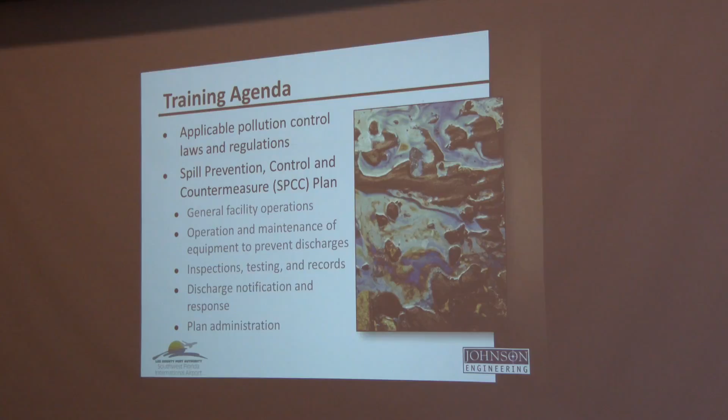The SPCC regulations have a similar origin to the SWPPP regulations. Both were born from the Clean Water Act enacted in 1972. However, the SPCC regulations are specifically geared toward oil. In 1973, the Oil Pollution Prevention Act was issued under Section 311J and Section 501 of the Clean Water Act. And the actual federal regulations now reside in 40 CFR 112. Another difference between the SWPPP and the SPCC regulations is that the EPA retains enforcement responsibilities of the SPCC regulations.

The Oil Pollution Prevention Act establishes the requirements for the prevention of, the preparedness for, and the response to oil discharges. It requires the development and implementation of an SPCC plan, and it details the procedures, methods, and equipment requirements necessary to move that plan forward.

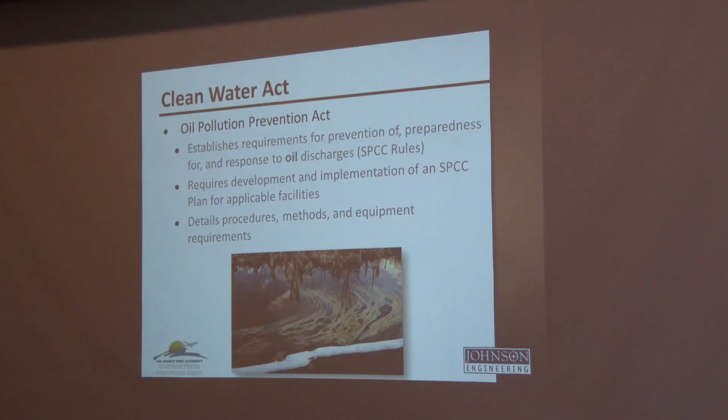So how does the SPCC rule apply? There are two requirements that must be met for the SPCC rules to become applicable. One is that the owner or operator of a facility has to be engaged in storing, transferring, distributing, using, or consuming oil. The second is that the facility could reasonably be expected to discharge oil in quantities that may be harmful into navigable waters of the United States.

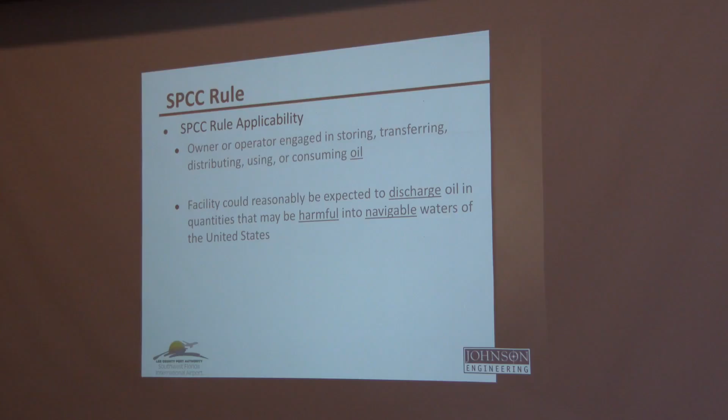So as with many laws, the true meaning lies in the definition of the terms used. And right here you can see I've emphasized oil, discharge, harmful, and navigable waters. And I'd like to jump into those terms in a little bit more detail before we move on.

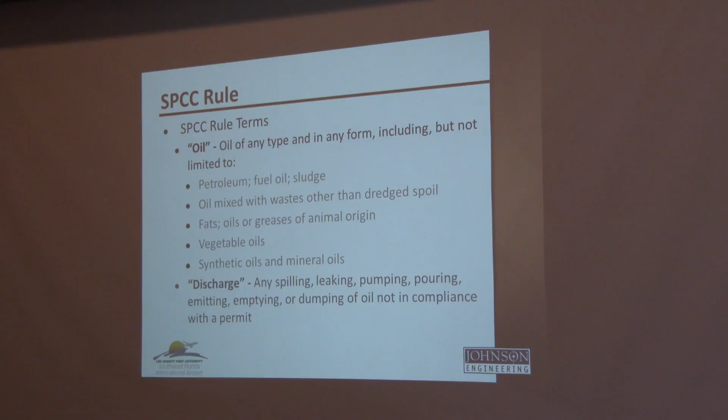Oil refers to oil of any type and in any form. It includes petroleum, fuel oil, sludge, oil mixed with wastes, fats, oils, greases of animal origin, vegetable oils, and even synthetic oils and mineral oils. A discharge is any spilling, leaking, pumping, pouring, emitting, emptying, or dumping of oil that is not in compliance with a permit.

Harmful quantities, these violate Florida water quality standards. That in itself doesn't help us much. So if we read down, we see that harmful quantities cause a film or sheen upon or discoloration of the surface of the water or adjoining shorelines.

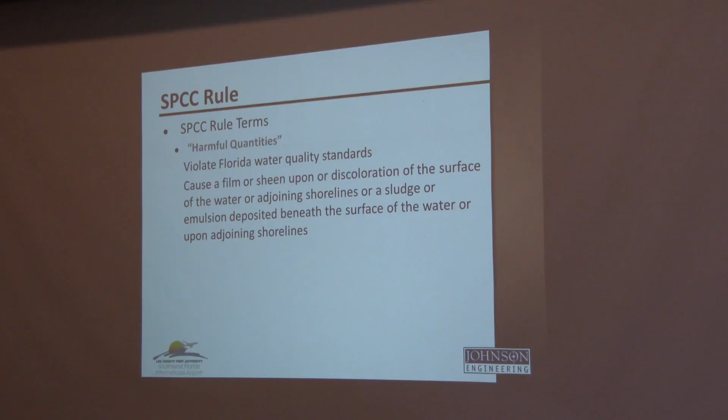And finally, navigable waters. Navigable waters are those waters that are subject to the ebb and flow of the tide, and or those waters that are used or have been used to transport interstate or foreign commerce.

Hold on one second here.

The EPA does set thresholds to determine if an SPCC plan is required. Those thresholds are an aggregate of 1,320 gallons or more of above ground storage, 42,000 gallons or more of underground storage, and there are some exemptions. Those include containers that are less than 55 gallons, containers that are permanently closed, and containers utilized for motive power.

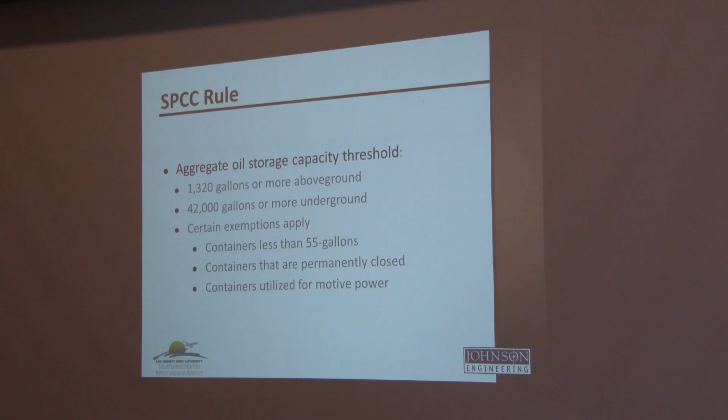So if you guys have a grounds maintenance tractor that has a 200-gallon fuel tank, and that fuel tank is primarily used to move that tractor forward, that container is exempt. However, if you have a 56-gallon container on a portable generator, that container is included in the SPCC regulations.

There have been some changes recently to the SPCC rules. We have a few slides dedicated to those changes. In July of 2015, the EPA published revisions to the underground storage tank regulations. Those revisions strengthen the federal underground storage tank regulations and increase emphasis on properly operating and maintaining UST equipment.

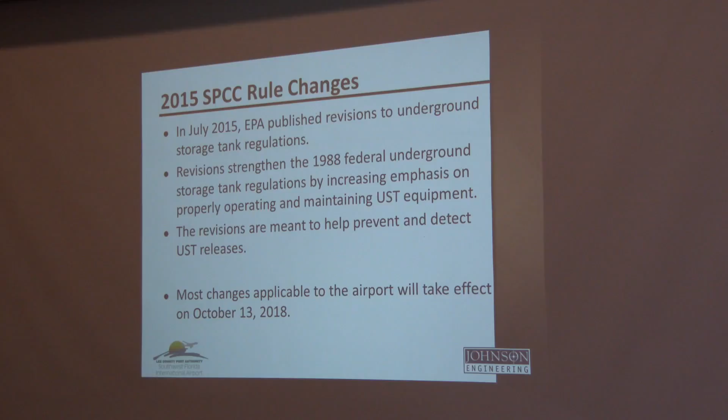A lot of you guys were probably here for the Marshall Mott Smith training that we received for UST operators, A and B, a little while ago. And then those revisions are meant to help prevent and detect underground releases from USTs. Most of the changes that are applicable to the airport will take effect in mid-October of 2018.

The 2015 SPCC changes include UST secondary containment and under dispenser containment provisions. So just as you guys understand, we just replaced the two 6,000 gallon tanks next door to us, but we couldn't just replace those tanks. We also had to do something about the under dispenser containment, so that if there's a leak in that dispenser system, the leak is contained by the dispenser itself.

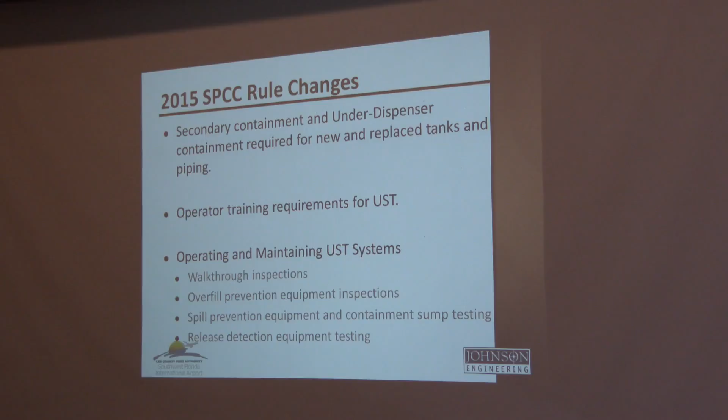We also had operator training for Class B and C UST operators. LCPA actually did Class A and B UST operators. And then the UST operation and maintenance provisions, including walkthrough inspections, along with regular equipment testing for overfill and spill prevention devices and release detection devices, were also included in the 2015 updates.

They also include requirements ensuring that UST systems are compatible with certain biofuel blends. If you guys were here for the Marshall Mott Smith training, you saw those awesome corrosion pictures where fuel blends like ethanol or biodiesel led to just absolutely horrible corrosion. That's what this is referring to.

This also removes past deferrals for generator tanks, field constructed tanks, and airport hydrant systems. And finally, there are updates to the codes and standards that regulate the construction and operation of UST tank systems.

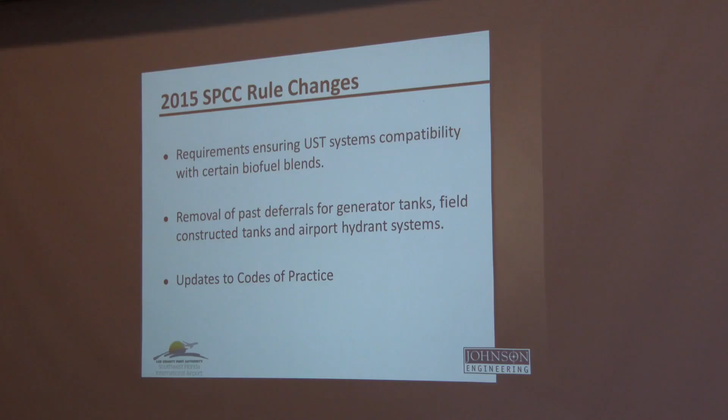All right, that concludes the background laws and regulations, and now we'll jump further into our SPCC plan that you guys have developed for LCPA.

Key components include a facility layout, discharge flow predictions, discharge prevention measures, discharge countermeasures, inspections and testing, and record keeping.

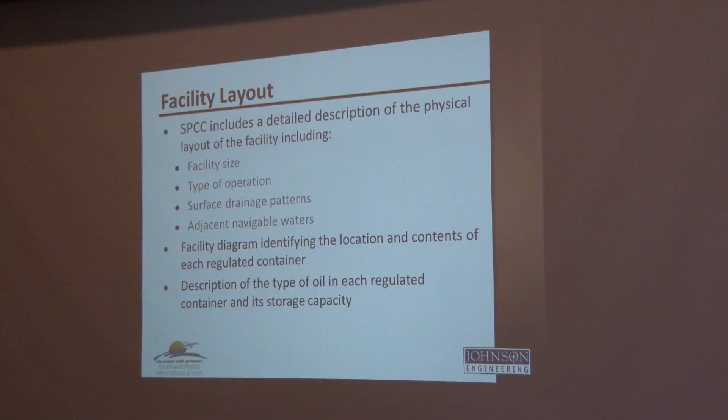Like the SWPPP, the SPCC includes a detailed description of the facility, including surface drainage patterns and adjacent navigable waters. We also diagram the location and contents of each regulated container, along with a description of the contents of each regulated container.

Luckily, drainage patterns haven't changed since 9 or 10 o'clock this morning. They still are generally from the northeast to the southwest. And there's a single outfall at outfall SW1 that drains to the Briarcliff Canal.

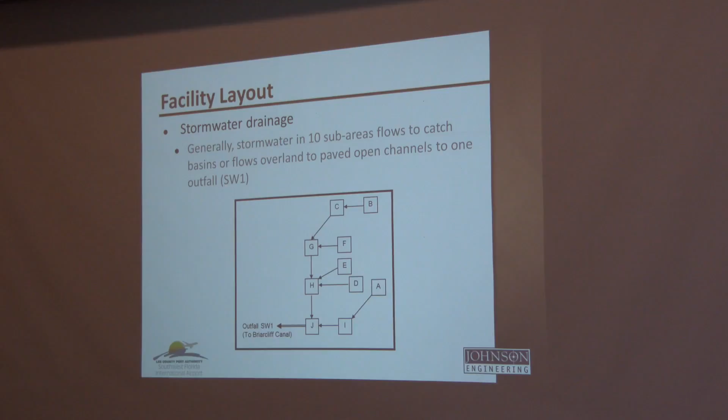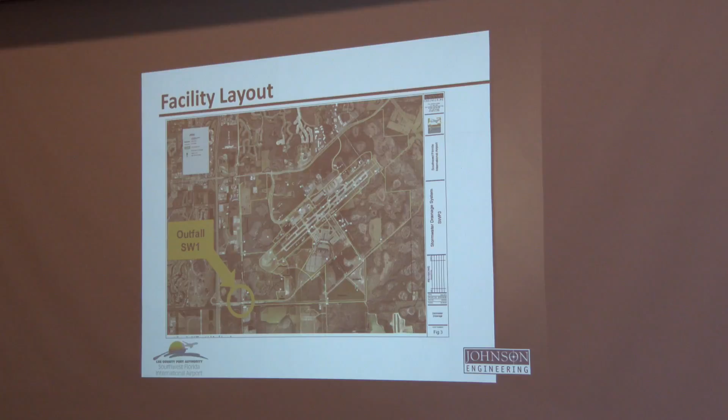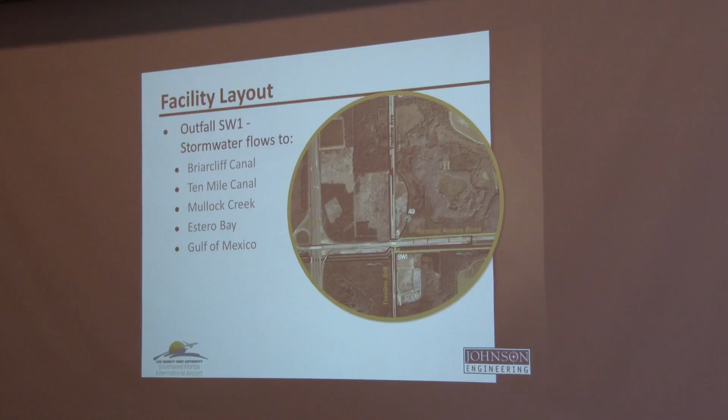From the airport property, the stormwater flows to the Briarcliff Canal, then to 10 Mile Canal, Mullock Creek, Estero Bay, and finally into the Gulf of Mexico.

All right, let's talk about the applicable operations at the airport that are regulated. Some of the regulated containers are obvious, like the above ground storage tanks. RSW has capacity for over 1.8 million gallons of oil stored in above ground tanks.

Some of the regulated containers fall below the applicable threshold, like the USTs for the concourse generators. RSW has capacity for about 12,000 gallons of oil stored underground. Now that is below the 42,000 gallon threshold that I talked about before, but it is an aggregate, so it has to be included.

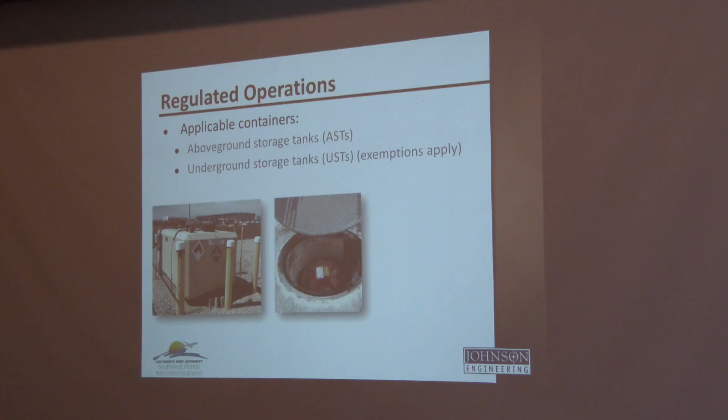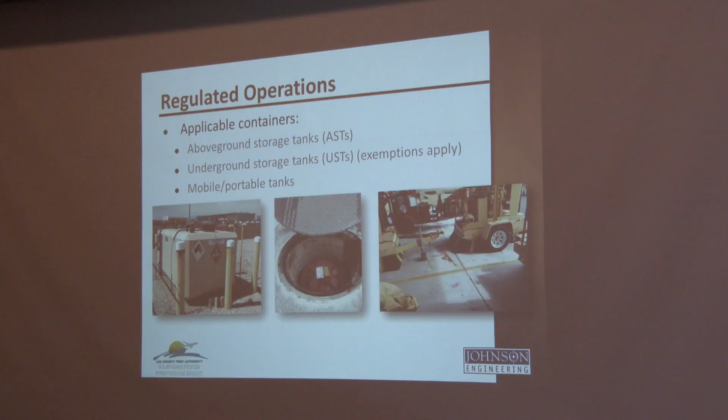And finally, we need to discuss some of the less obvious tanks, including diesel-powered pumps, generators, air start machines, and other motors where the storage tank exceeds 55 gallons and is not used primarily for motive power. Some other non-traditional containers include mobile refuelers, drums of 55 gallons or more, and even transformers and elevator reservoirs.

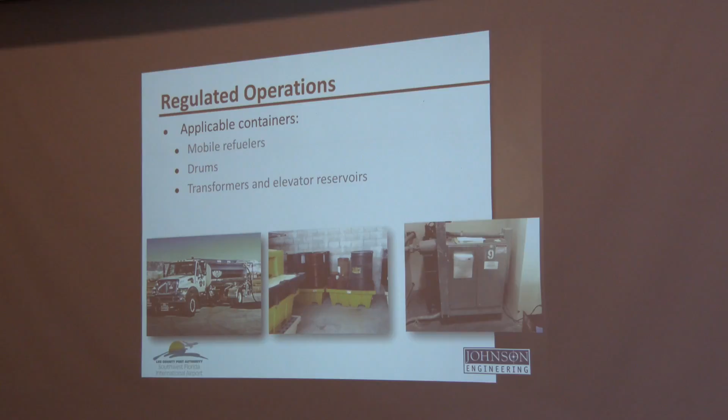The airport conducts several activities that could reasonably be expected to discharge oil into the waters. Those include product storage and filling and draining, container and equipment maintenance, vehicle and equipment fueling, fueling system maintenance, and drum handling.

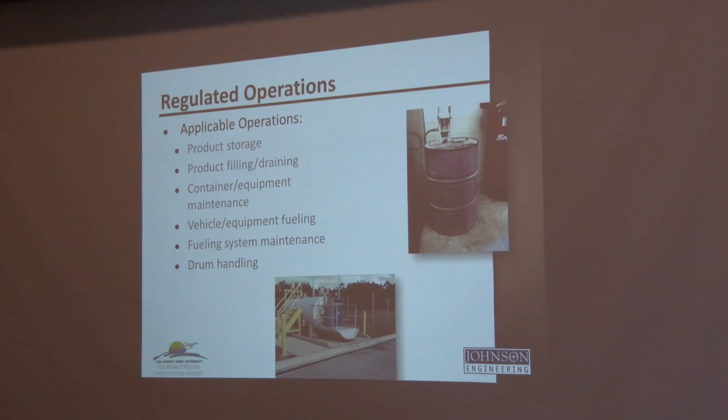One key component to the SPCC that is different from the SWPPP is the development of discharge flow predictions for each regulated tank on the airport in case there is a spill.

This analysis includes the total likely quantity of oil that could be discharged during an equipment failure, along with the rate of flow and the likely direction the oil would follow. This analysis includes the tanks, of course, but it also includes the pipes, hoses, fittings, and other attachments.

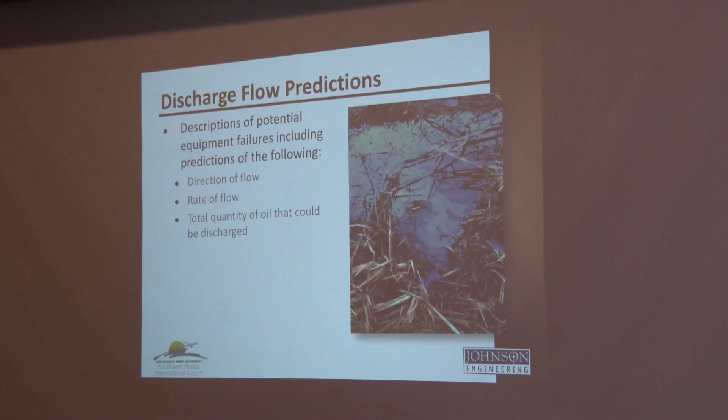All right, let's look at the individual letters of the SPCC plan acronym. First, we have spill prevention. This basically means that you keep the oil in its intended container. This includes personnel training, facility design and layout, protecting tanks and containers, equipment maintenance and installation, testing and maintenance of spill prevention devices.

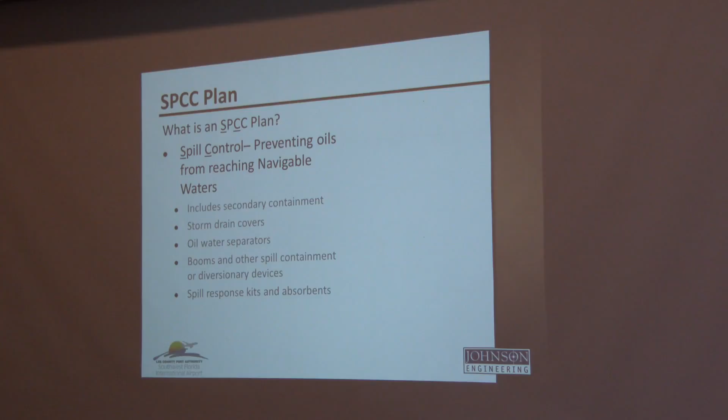Second up is spill control. Now, a spill has occurred, and now you want to keep the spill from reaching navigable waters. This includes secondary containments like double-walled tanks, spill decks, etc. It includes oil water separators, booms and other spill containment devices, and spill response kits and absorbents.

And finally, we have spill countermeasures, and these are the procedures for recovery, response, and cleaning up the spill. This includes the spill kits again, but it also includes good housekeeping practices, preventing spills from moving downstream, proper disposal of cleanup materials, reporting and record-keeping procedures.

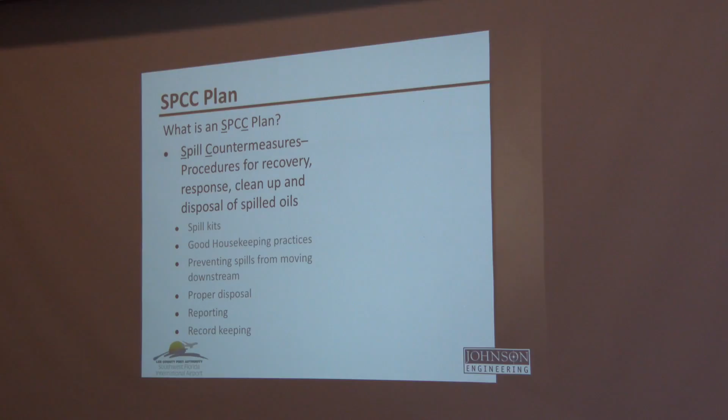All right, so back into the spill prevention measures. These are the best way to keep the oil in its intended container. This includes maintaining equipment to prevent leaks and spills, and it includes bollards to protect tanks from collisions.

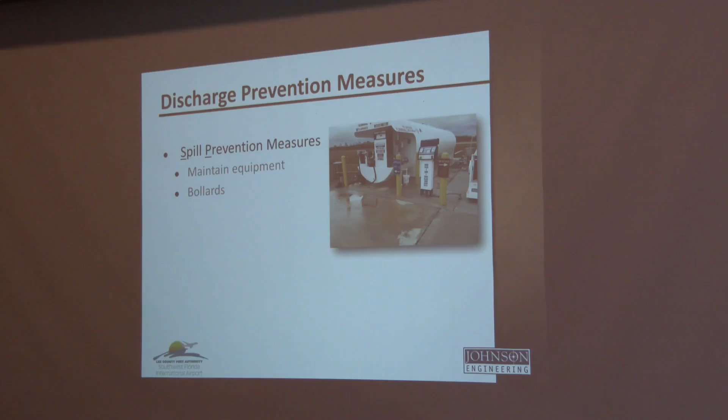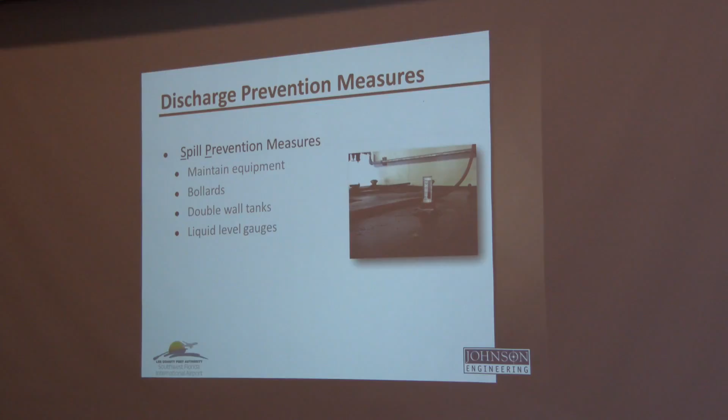Double-walled tanks provide additional collision protection and corrosion protection. Liquid level gauges ensure that you don't overfill the tanks, and alarms and monitoring devices make sure that the tank is operating as it was designed.

There's also personnel training, which luckily you guys are here with me today, and we'll get that one checked off before we leave.

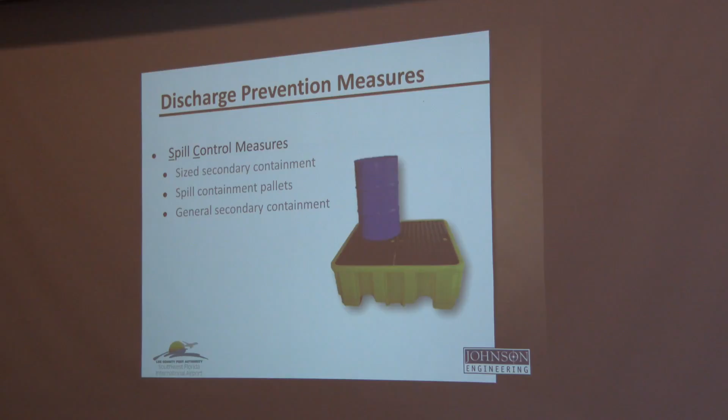Spill control measures, a little bit more detailed here. They include the methods to contain the spill once it has occurred. This includes sized secondary containment structures of concrete, earth, double-walled tanks, and spill containment pallets.

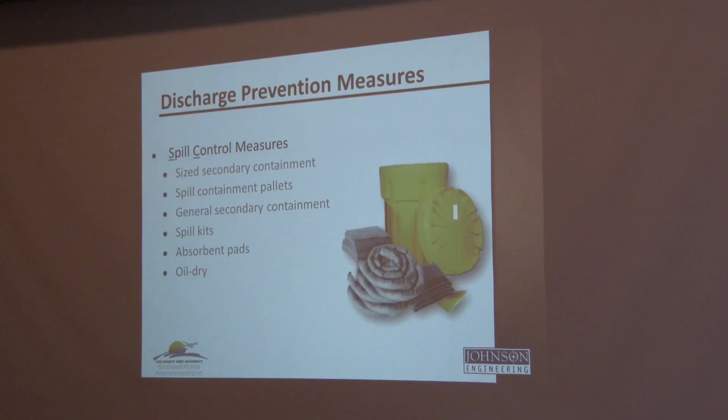It also includes methods to absorb or divert spills from sensitive areas or storm drains, as well as spill kits, pads, kitty litter. Storm drain covers and booms are also included.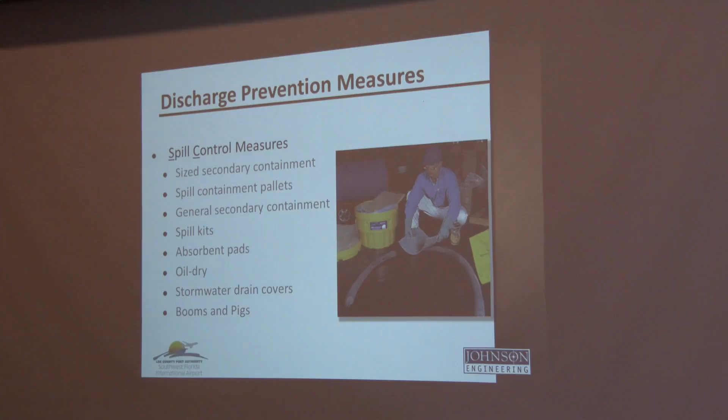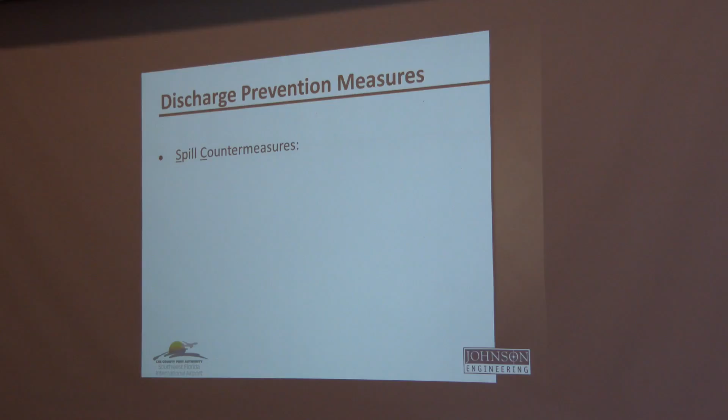And spill countermeasures. Moving to the countermeasures, we have stopped the spill, but now we need to clean it up and keep it from moving downstream due to a storm event. Again, we see the spill kits, but we also have structural controls like swales and diversion ponds and oil water separators that keep oil from entering the navigable waterways.

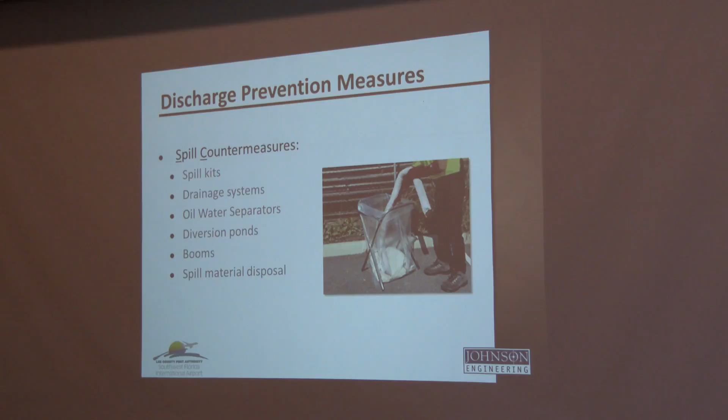Booms and other spill response materials need to be used properly and disposed of properly once they're used. Remember, store the used absorbents and other spill response material in a watertight container. Store them indoors or under cover until you can schedule a pickup with your waste hauler.

And finally, there is the reporting that will need to take place. Make sure that you notify your supervisor. Operations and ARFF will provide a spill report that will be kept and updated in the SPCC spill log.

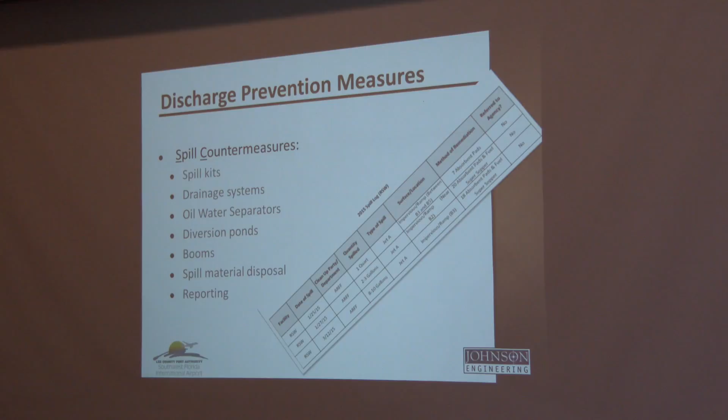A large part of your regular tasks are going to be related to inspecting some of the passive controls that you guys have installed here at the airport. As you know, these inspections need to be on a regular basis and they need to be a formal part of your duties. Inspection of the facilities, along with leak prevention and detection equipment and sensors, will likely increase to meet the October 2018 deadlines of the new SPCC regulations.

While you're inspecting the equipment, look for leaks or spills and report them. These spills need to be addressed quickly upon discovery, and develop and use good checklists so that you know you've been efficient and effective at inspecting the facility.

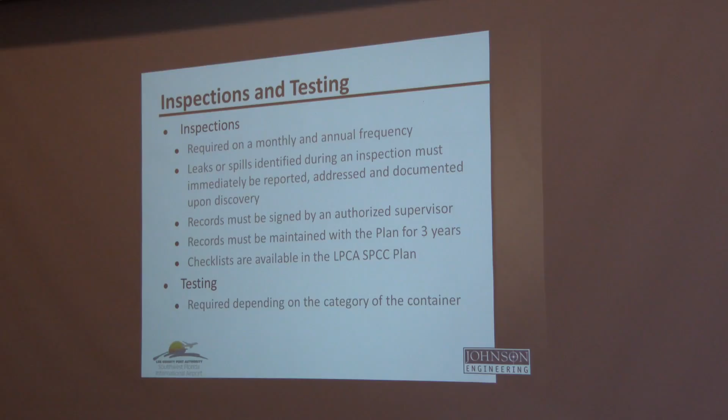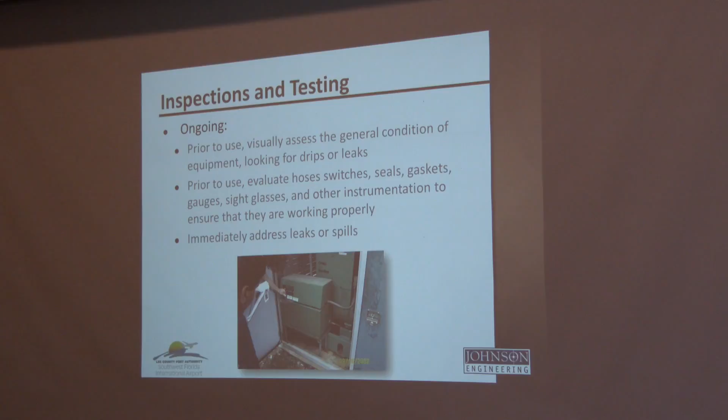As you guys know, the inspections need to be an ongoing, everyday part of your daily activities. So before you use any piece of equipment, visually assess the general condition of the equipment in the area, looking for drips or leaks. Prior to use, evaluate the hoses, switches, seals, gaskets, gauges, sight glasses, and other instrumentation to make sure that they're working properly, and immediately address those signs of leaks once they're seen.

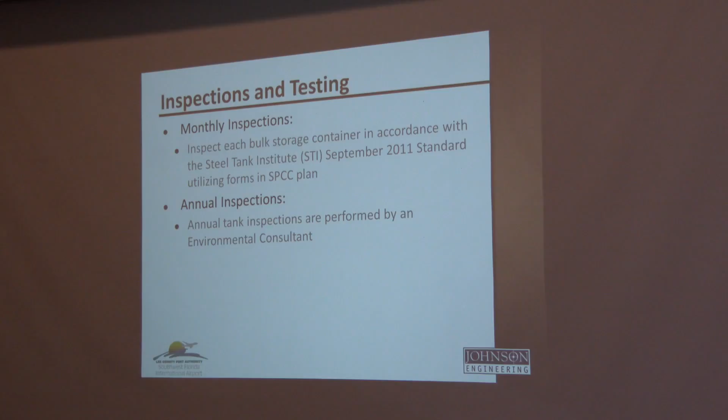Monthly tank inspections need to be performed in accordance with STI standards, and use forms and checklists to make sure that your inspection is both efficient and effective. And typically annual tank inspections are performed by outside contractors like Guardian.

All right, during the 2016 annual inspection, we found a few items that we probably need to be discussed. This spill occurred at the QTA tank farm in January. The tank had overfill sensors in place, but about 150 gallons of gasoline was spilled during an automated tank leveling cycle. Vacuum equipment and soil excavation was required to retrieve the gasoline, and luckily none of the oil reached the water.

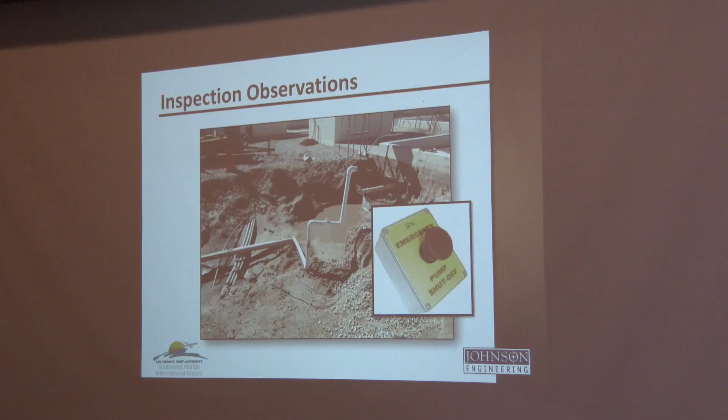The ultimate spillage was less than the reportable threshold. One key takeaway on this incident was that the emergency pump shutoff switch was not immediately utilized. In your training, make sure that you locate the nearest emergency shutoff at each location where you work.

This tank is at the electrical vault, and it has had single wall piping for years and years now. Corrosion and damage to the pipe could have resulted in the release of the entire tank's contents over a semi-pervious gravel foundation. So that's one thing to kind of keep in mind here.

This surface here is impervious, meaning that if something spills on it, it's going to stay there. But right here, this is all surrounded by gravel, meaning that if a spill hits that, it's basically into the ground.

All of the single wall piping was replaced earlier this year and demonstrates LCPA's ongoing commitment to improving pollution control efforts.

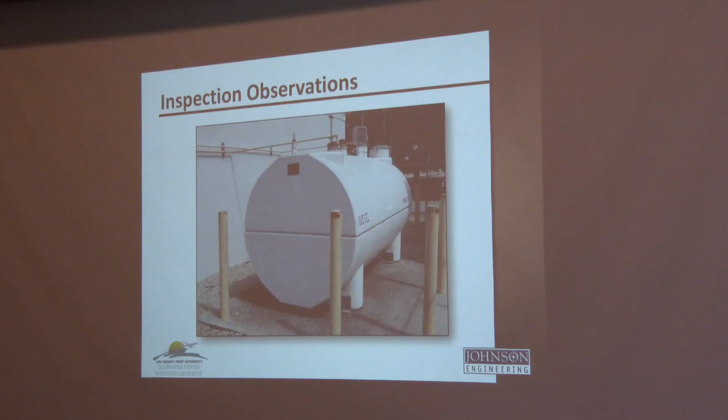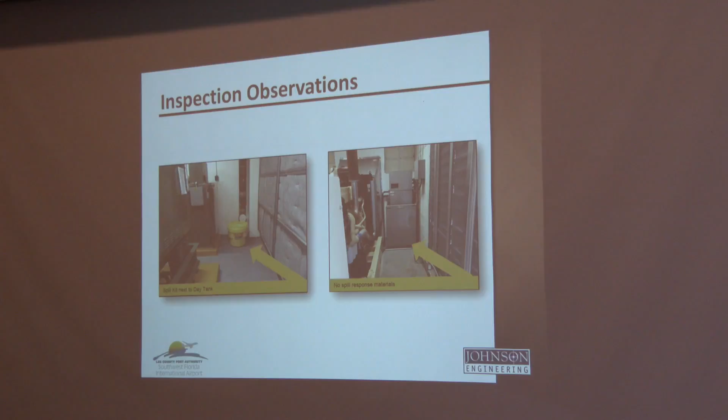Spill kit? Candy bar. Ready? Oh, my bad, I'm sorry about that. Way off. Put him on the bench. Put him on the bench. Send out the lefty.

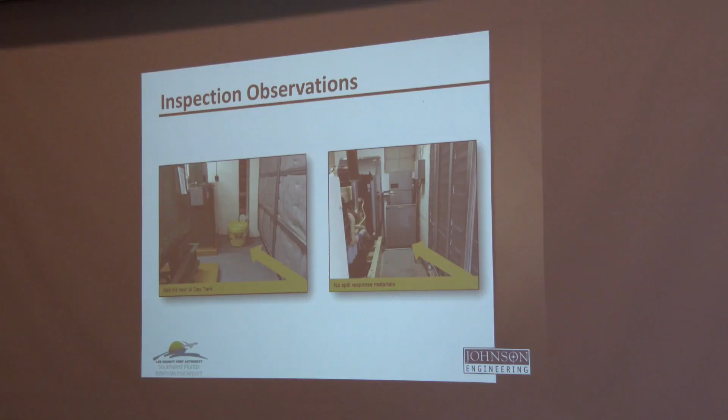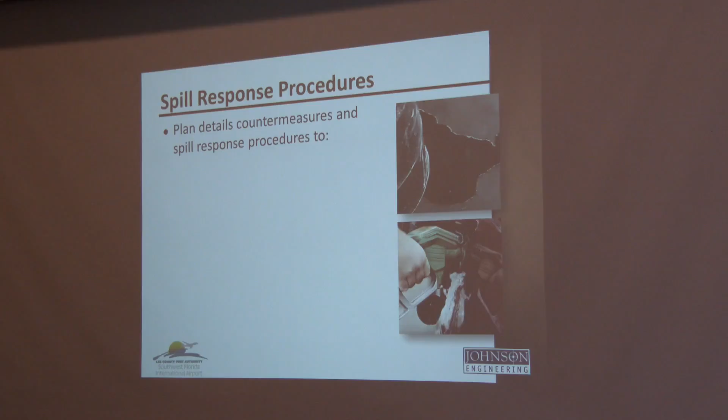All right, we talked about the 3 R's a little bit earlier, and we're going to jump back into those now. The 3 R's of spill response procedures include recognize the spill, respond to the spill, and report the spill.

Some spills are easy to recognize. Large amounts of oil or fuel that are spewing out are seen as an imminent threat. Smaller spills often go unnoticed or unreported. Checking equipment, fueling areas, and parking spaces for signs of spills should be part of your everyday operation. Once you recognize there is a spill, try to determine what the material was. This can change the method of response. If the spill presents an immediate health or safety risk, evacuate the area and please contact Air Comm Central.

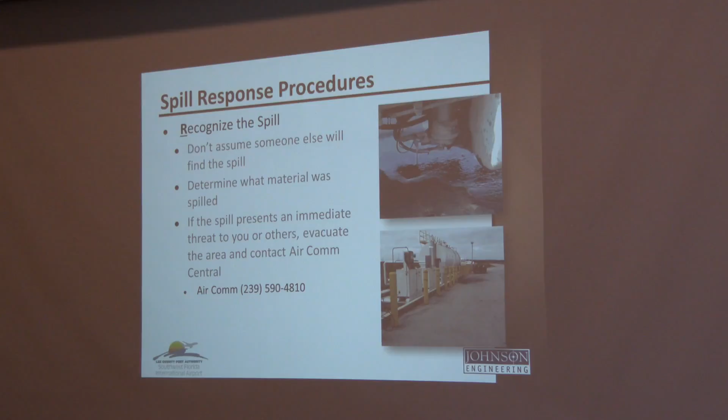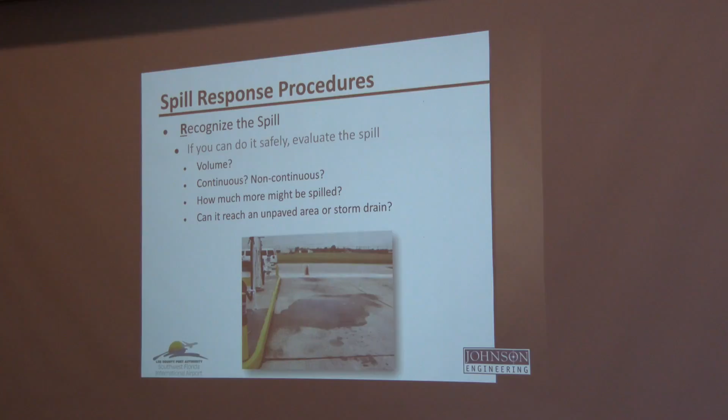Of course, not all spills are created equal. Spills can vary in size, discharge rate, and materials spilled. All of these can affect how the spill is responded to. So if you can do it safely, evaluate the spill for its volume. How much or how fast is it spilling? Is it still spilling? How much more could potentially spill? And can it reach an unpaved area or a storm drain?

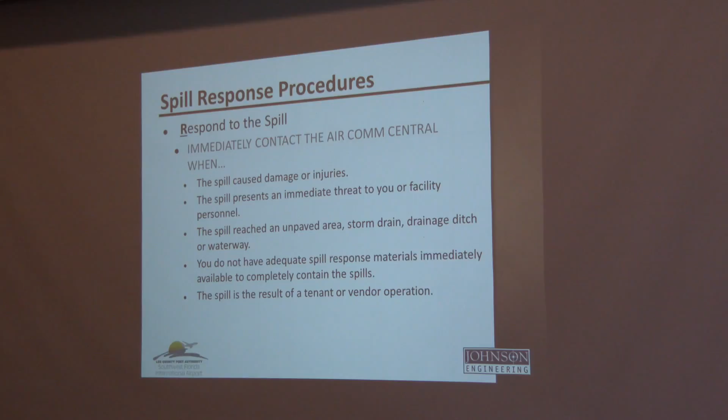Responding to the spill: immediately contact Air Comm Central when the spill caused damage or injuries, when the spill presents an immediate threat to you or other personnel, when the spill reached an unpaved area or storm drain or a drainage ditch, if you don't have the adequate spill response materials, or if the spill is a result of a tenant or vendor operation.

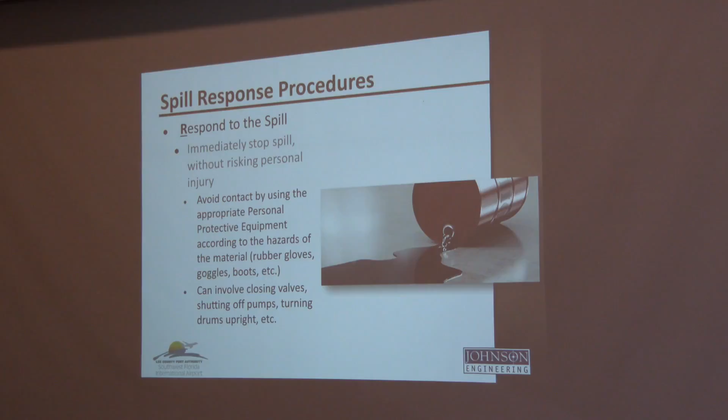All right, responding to the spill. Remember that you may need additional PPE to respond to the spill. Your first priority needs to be to stop the spill before you begin cleaning. Again, it's counterproductive to clean up your spill before you finish making it. Stopping the spill can range from fixing small hydraulic leaks at vehicle maintenance, uprighting a drum, or hitting that emergency pump shutoff button.

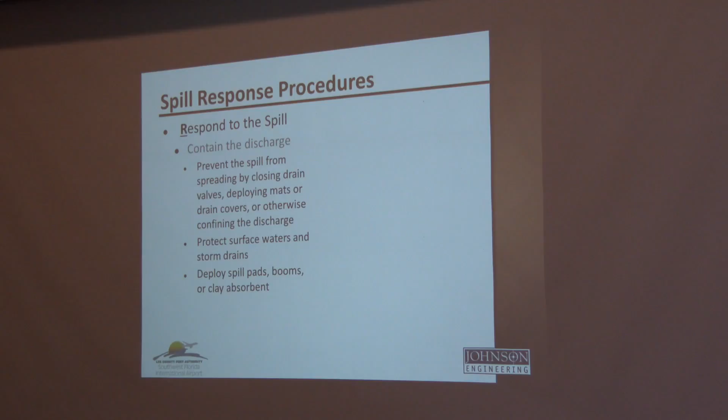Once the source of the spill has been stopped, evaluate the spill to see what direction it's traveling. Keep those spills away from unpaved areas, ditches, gravel areas, and storm drains. If there are storm drains present or nearby, use drain covers or booms to protect those areas and divert the spill to another area.

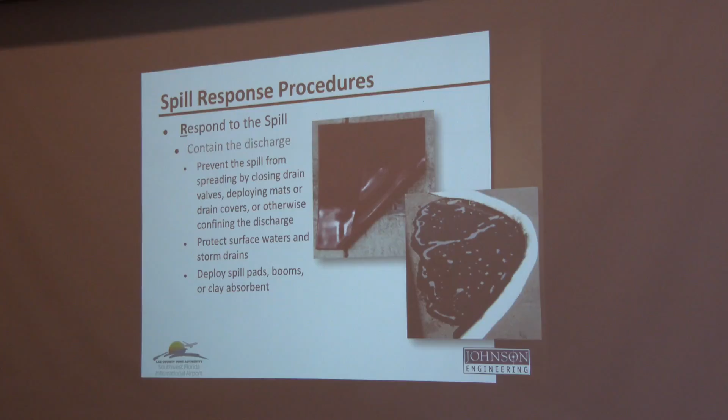When you're sure the leak is stopped and can't reach any environmentally sensitive areas, use your spill response materials to absorb the spill. And remember to dispose of all those spills appropriately. The sooner you get those things cleaned up, the easier and cheaper the cleanup activities will be.

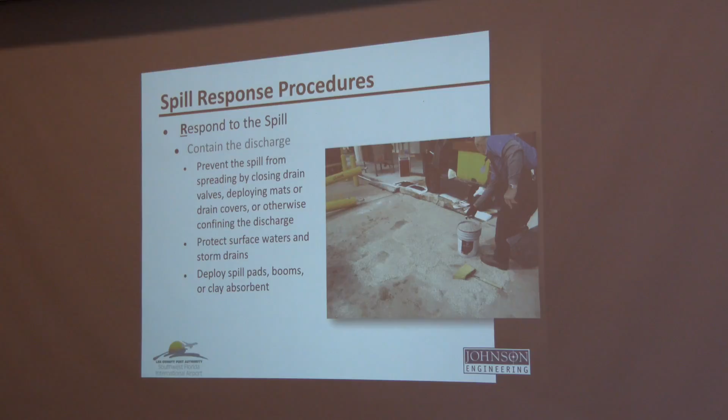Spill reporting typically flows from the staff member who finds the spill up to a supervisor, then to AirCom Central, Operations, ARFF, and/or LCPA, and then on to the applicable agency. AirCom Central will at a minimum require the location of the spill, the substance spilled, the quantity, and the status of the spill. This information is used to create the spill log we've talked about earlier, and copies of all incidents are kept with agencies.

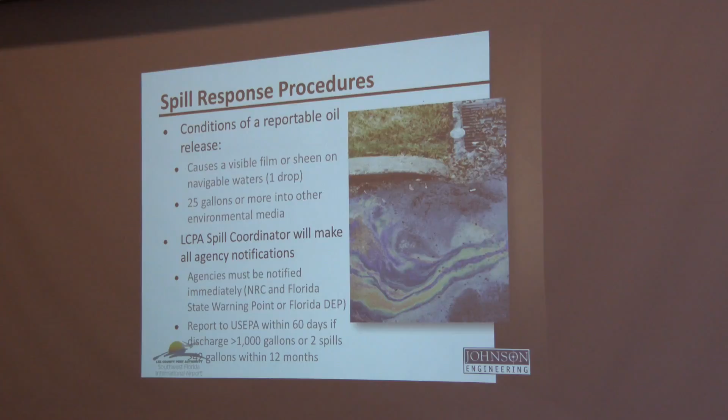Conditions of a reportable oil spill include: it causes a visible sheen on navigable waters - again, this could be as little as one drop. If it's not to the water, but it is to a pervious surface, it's 25 gallons or more onto that environmental media. The LCPA spill coordinator will make the agency notifications as necessary.

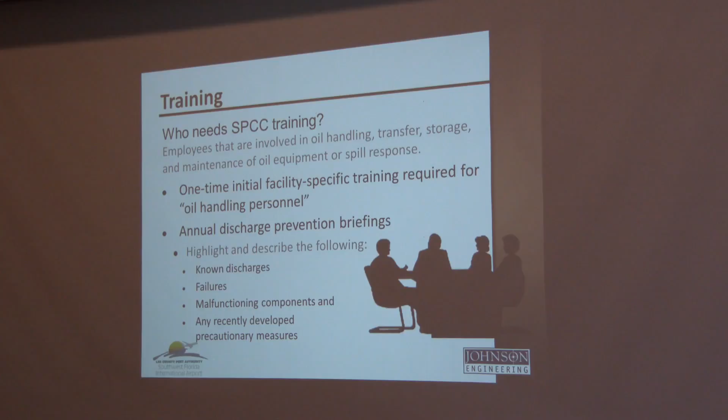That moves us into our SPCC training. Employees involved in oil handling, transfer, storage, and maintenance of oil equipment or spill response need to have training. That includes a one-time initial facility-specific training required for all oil handling personnel, along with annual discharge prevention briefings, which we're doing right now. During those briefings, we need to highlight and describe the known discharges, failures, malfunctioning components, and any recently developed precautionary measures.

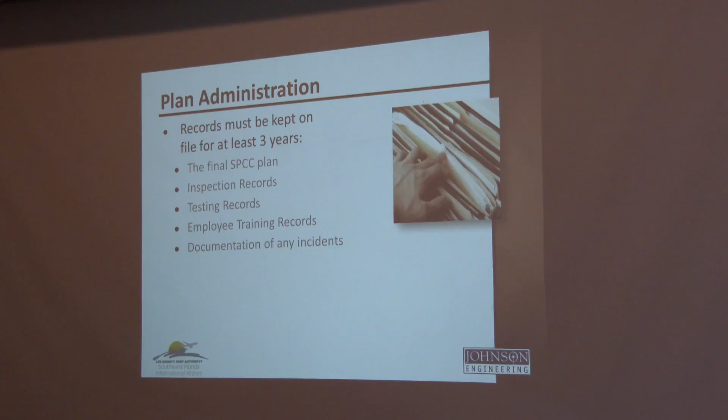All of these records need to be maintained on site for at least 3 years. That includes the final SPCC plan, the inspection records, your testing records, employee training records - so please make sure you sign in before you leave - and documentation of any incidents.

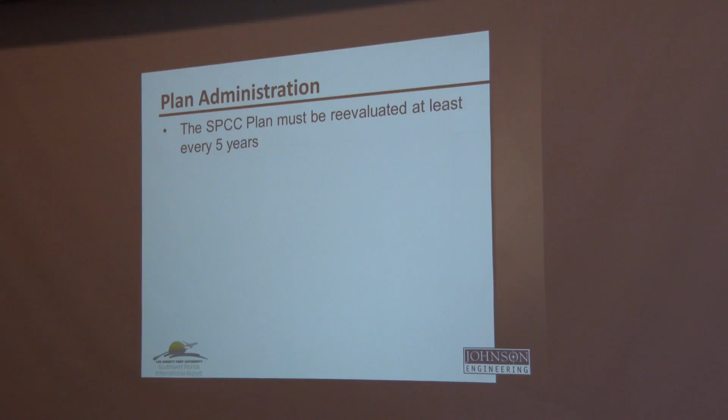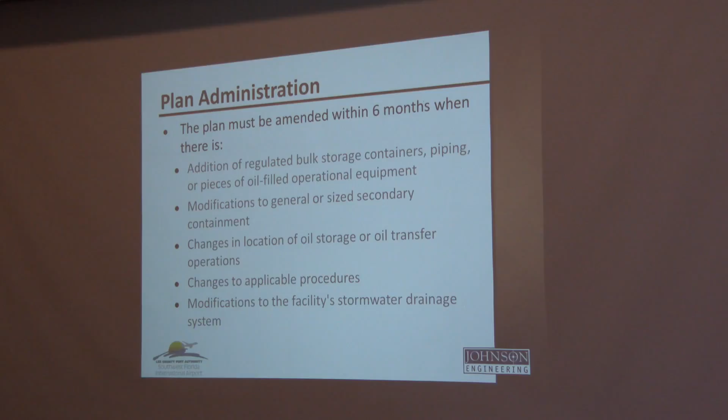The entire SPCC needs to be evaluated and updated at least every 5 years. Additionally, the plan needs to be amended within 6 months when there is an addition of regulated bulk storage containers, such as the 2 new 6,000-gallon storage tanks next door to us, when there's new piping or pieces of oil-filled equipment, any modifications to the general or size secondary containment that you guys have on site, changes in location of oil storage or transfer operations, changes to your procedures, or any modifications to the facility's stormwater drainage system.

So you guys are out there operating, you guys are doing the work, and if something comes up that needs to be changed, just make sure that Alicia knows so that she can incorporate those changes into the SPCC plan. That keeps us all current and up to date so that when we are inspected, everything goes smoothly.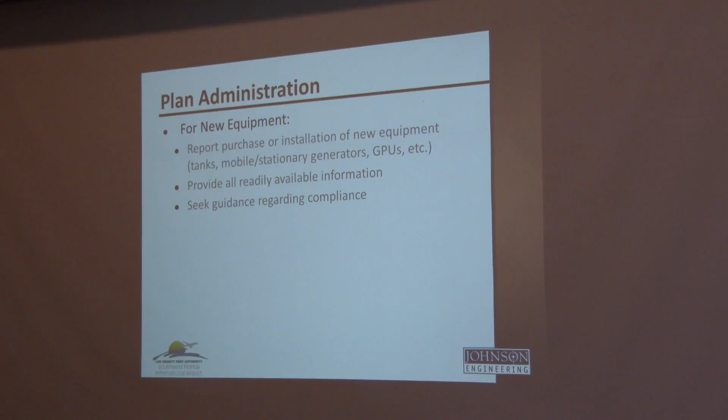There is some reporting requirements for new equipment. So anytime anything is purchased or installed, everybody needs to let Alicia know, provide all the readily available information, and then make sure that you comply with the regulations as they pertain.

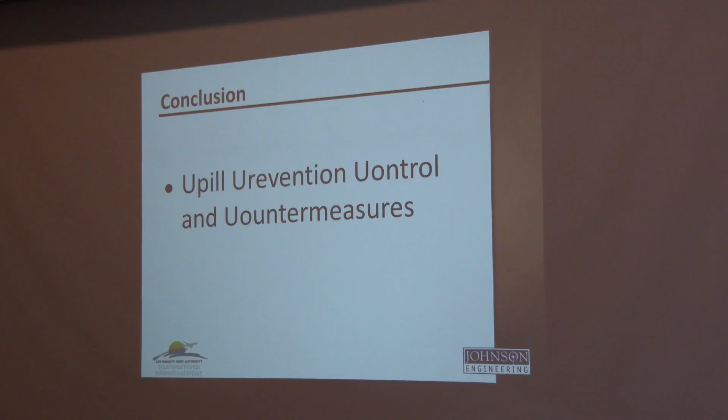All right, that concludes the presentation today, but remember, spill prevention, control, and countermeasures begins with you.

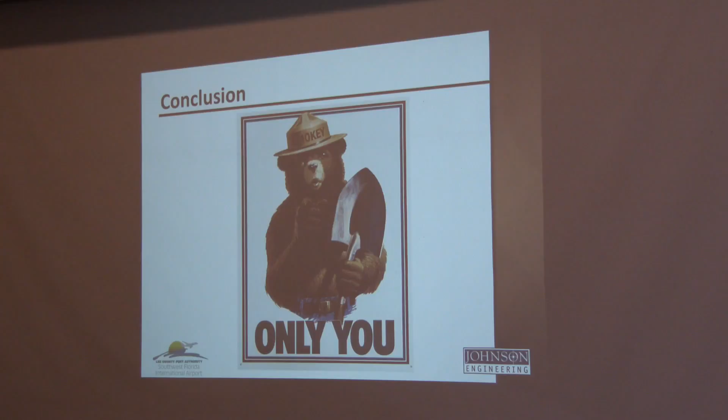Nothing. Outstanding. All right, no, that's actually wrong. It actually begins with an S, a P, and 2 C's. All right, so we're going to try one more here. Only you can prevent, control, and countermeasure spills. Look at that. Silence. Nothing. Outstanding. Outstanding. I'm going to be a comedian when I grow up, I promise.

All right, so here it is. The good work that you guys do here at RSW eventually leads to all of this. We all thank you for keeping Southwest Florida's water clean and usable. Without people just like you doing your job every single day, no one would be able to enjoy all that Southwest Florida has to offer. So personally, I thank you.

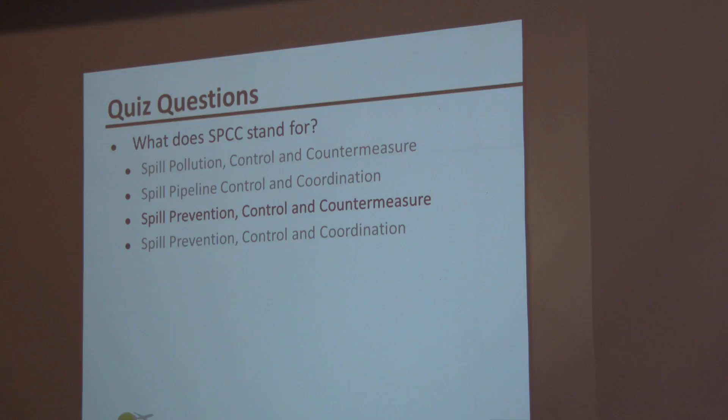All right, true or false? FDEP enforces the provisions of the SPCC plan. False. Who does? EPA. Outstanding.

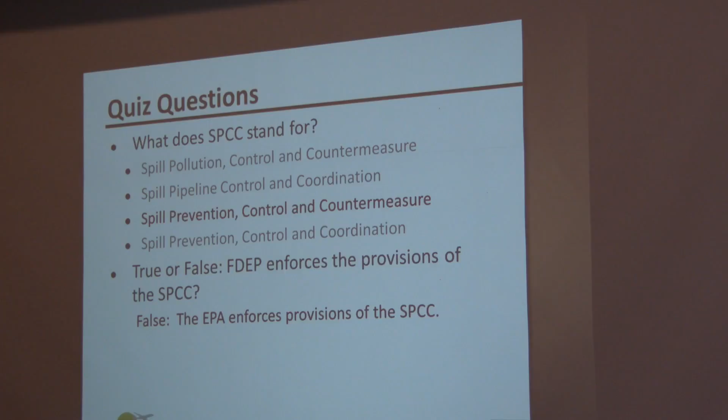Very good. Containers with a capacity of less than blank gallons are exempt from the SPCC rule. How much? Try again? 55. 55. Exactly right. What happens if you have 25 gallons of product in a 55-gallon container? Is that regulated? Yeah, it's the container that's regulated. If you had 25 gallons of product in a 25-gallon container, that's not regulated.

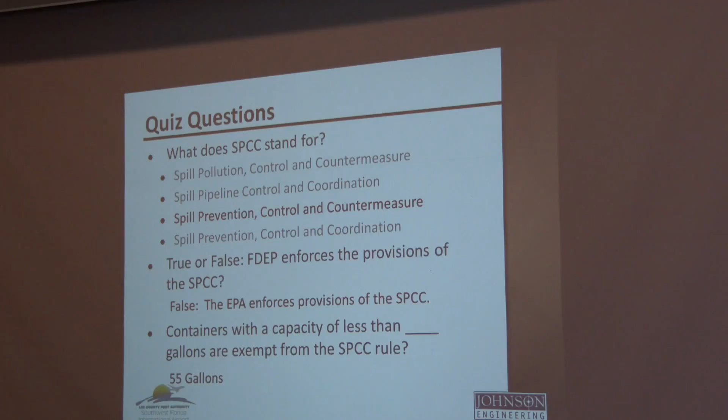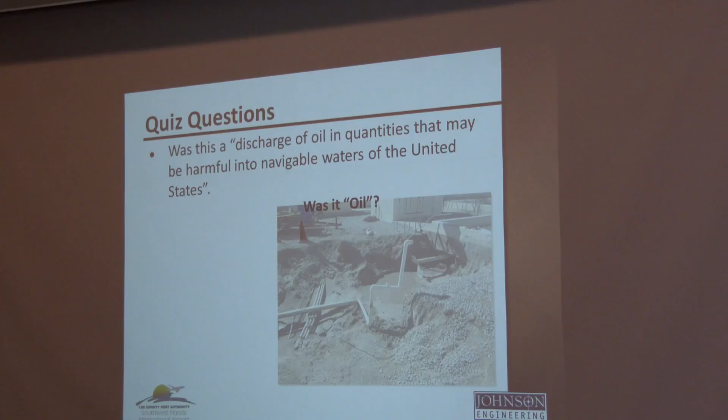Okay? Was this a discharge of oil in quantities that may be harmful into navigable waters of the U.S.? All right, I got some yeses, I've got some nos. Let's walk through it a little bit, side by side. Altogether, was it oil? No. Was it oil? Yes. Yeah, remember everything that's petroleum-based and animal-based, vegetable-based, mineral-based, all of that stuff is oil. So yes, this was oil.

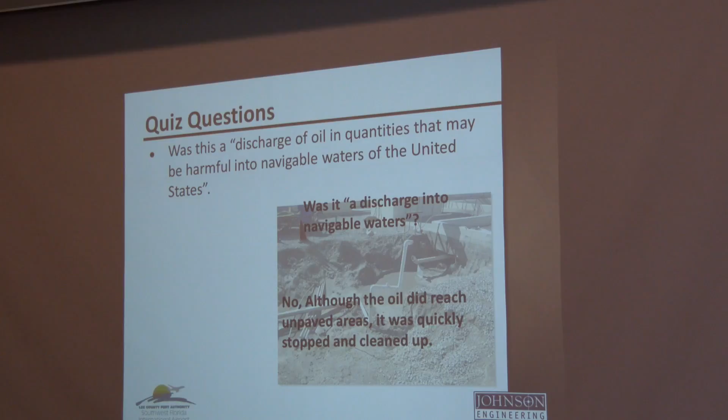Was it in quantities that may be harmful? Yeah, probably. 150 gallons could definitely be harmful. And then was it a discharge into navigable waters? No, it was not. Although the oil did reach unpaved areas, some of the oil, about 20 gallons or so, it was quickly stopped and cleaned up.

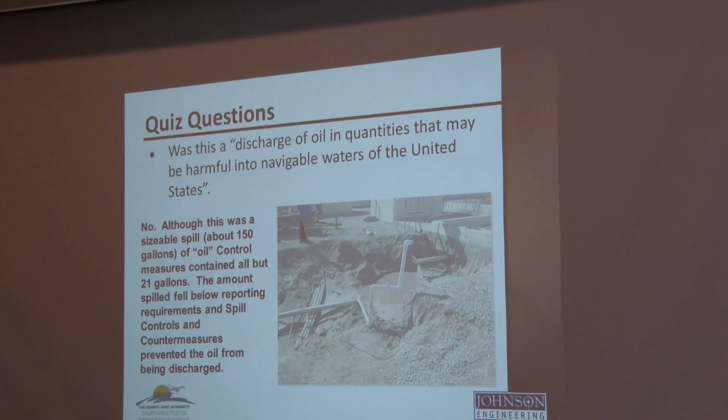So in all, this 150-gallon spill of oil, the control measures contained all but about 21 gallons. The amount spilled fell below the reporting requirements, and spill controls and countermeasures prevented the oil from being discharged. Now, there was some discussion that had to be made between Alicia and the appropriate agencies. This was an incident, but it was not a discharge. So well done, guys.

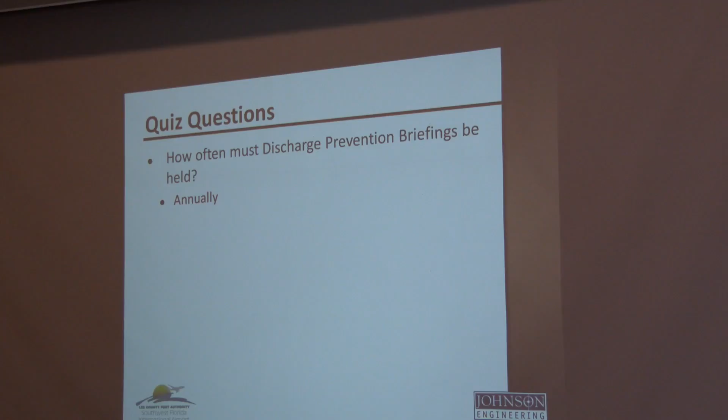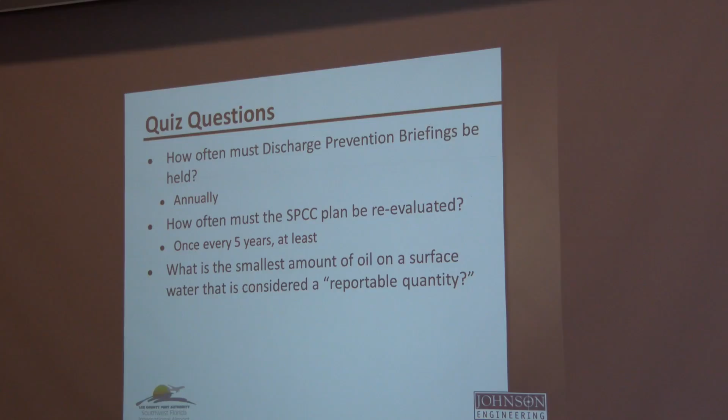All right, how often must discharge prevention briefings be held? That's what we're doing here today. All right, how often must the SPCC plan be reevaluated? 5 years. Every 5 years? I like that one. At least. And then what is the smallest amount of oil on a surface water that is considered a reportable quantity? A drop. A drop. They can produce a sheen. Very good. That's all I'm going to do today, I promise.

Let's open up for discussion and comments again. You guys are the professionals here. You guys are keeping this facility looking great. So if you guys have any discussion or comments that have come up in the past few months, now's a good time to talk about it. All right. Thanks a lot, guys.